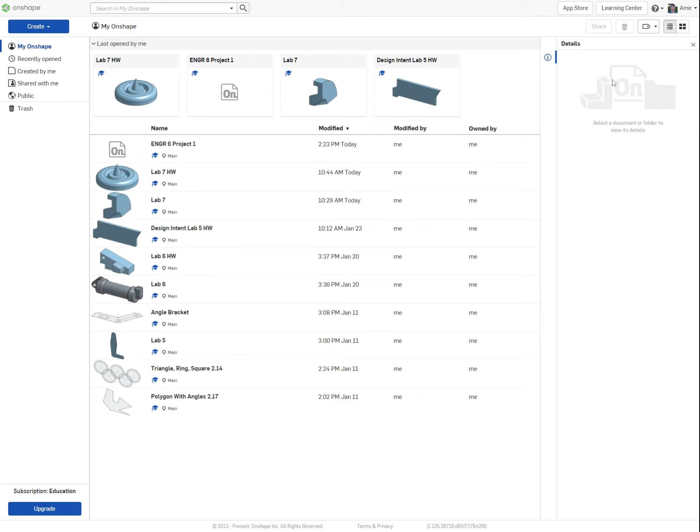I'm going to call it Lab 7 Tutorial. We're going to create a new sketch. I'm just going to make it on the front plane.

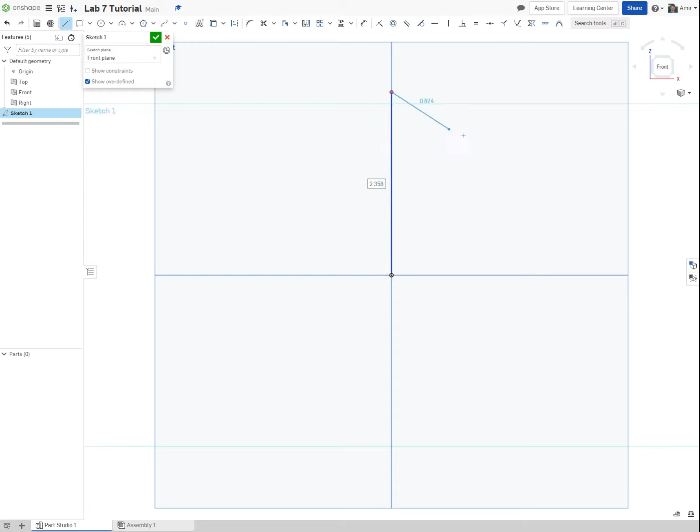As always, I'm just going to throw it on all my lines and then we're going to constrain them later. So vertical, diagonal, vertical, horizontal, vertical, horizontal.

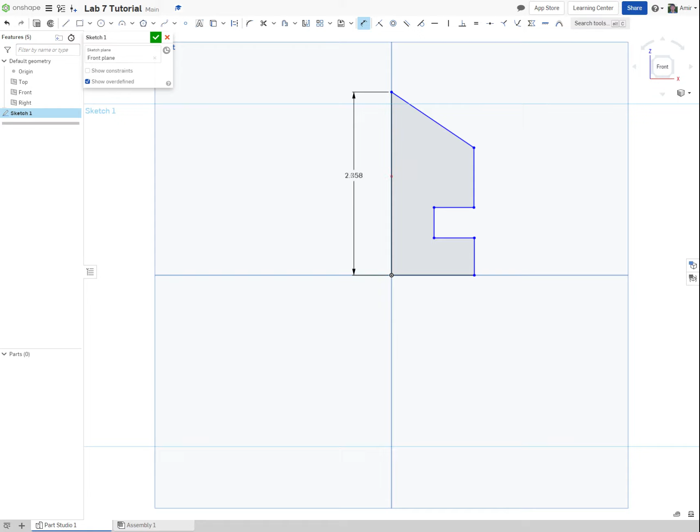All right, so this is what the general shape looks like. Now for dimensioning, I used each line on the graph as 1 unit, or I guess for this it'll be 1 inch. So starting with vertically, it's going to be 6 inches.

Horizontally, it was 2. Here it was 1. Here it was also 1.

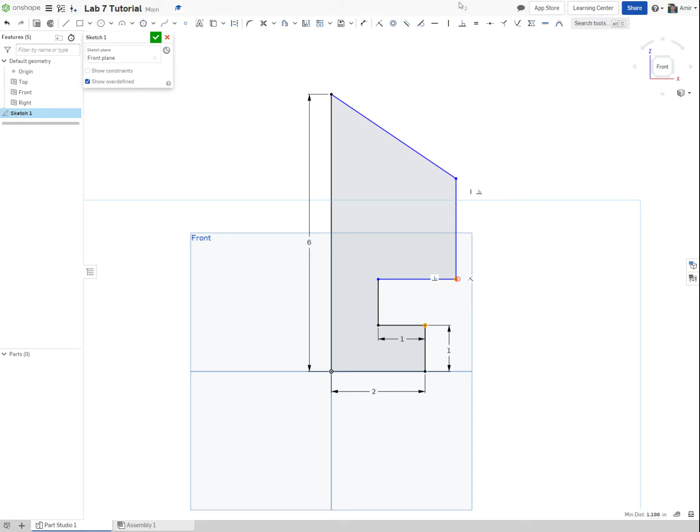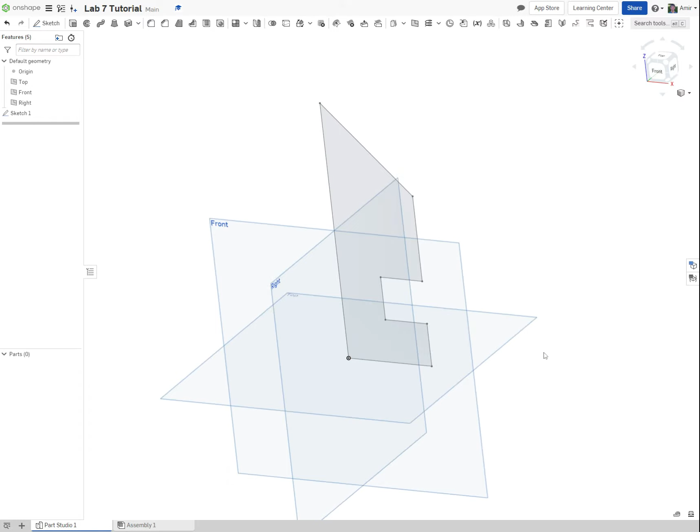And that's the sketch. All right, so now we need to finalize this, and we're going to work through each one of the steps. So for the first one, it's just a simple extrude. We're going to extrude this, and it's going to be 5 units. Okay, finish that. So that's the first part.

Now for the next profile, I'm going to duplicate this. I'm going to come here and delete that. So now we still have my sketch, it's all there. And I'm actually going to go ahead and duplicate this twice, once, twice, that way we can finish them later.

So for this one, we're going to do the revolve. Grab our revolve tool, click on the face, and our axis is just going to be the vertical axis. So we get something like this. That's that second one.

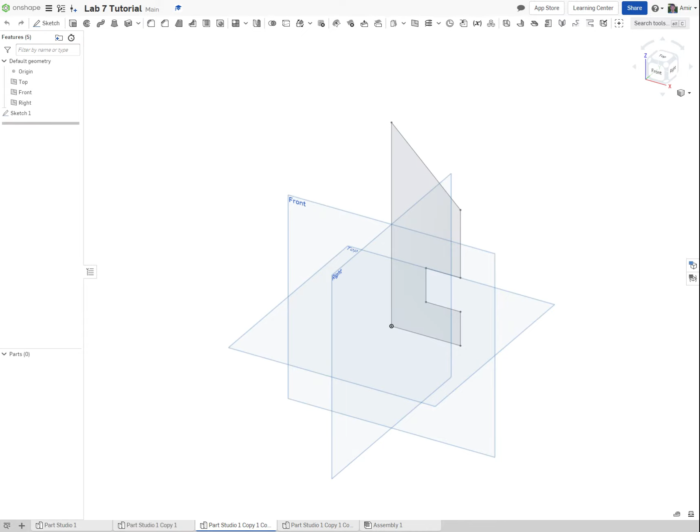Now for the next one, we're going to do the similar thing, but do it over the x-axis. Grab that, grab our face, and that's what it should look like. Go ahead and finish that up.

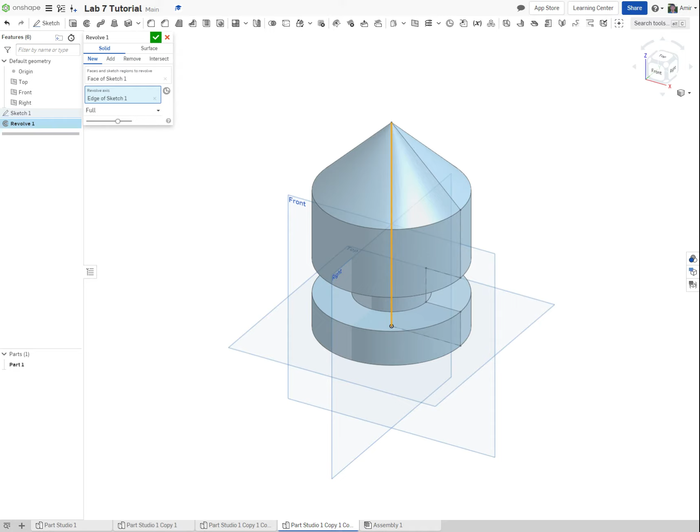Now for this one, we're going to do something similar, around the y-axis. But instead of doing it the whole way, actually no, it's around this axis. It's going to be one direction, 90 degrees. And that's how you do that.

Okay, so now we're going to do the next part. I'm going to create a new part. We're going to make a new sketch on the front plane.

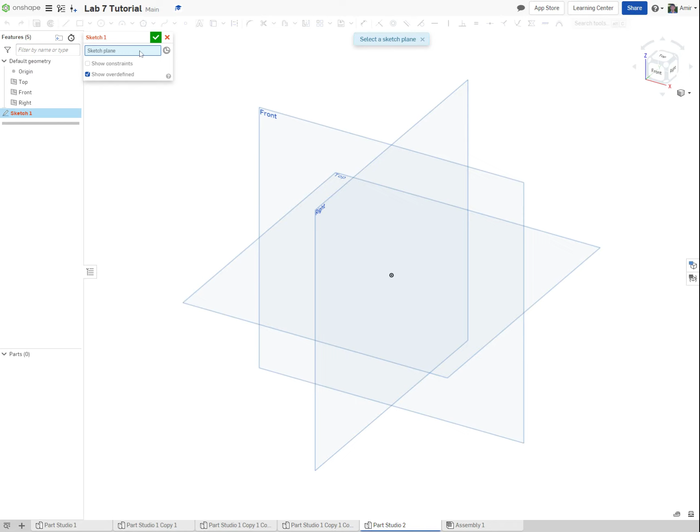So for this one, similarly, I'm just going to go through and draw my lines. I'm going to have to fix that vertical one later. So this one needs to be vertical, right? And let's just start dimensioning.

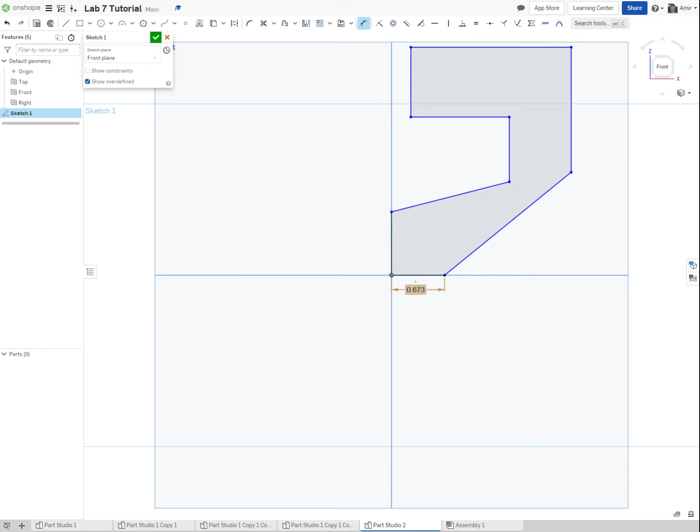This one's 1. This one is also 1. Hold on, let me move this up here. Let's see here, this is going to be 2.

Between here and, actually no. Between here and here, it's going to be 2. Between here and here, it's going to be 3.

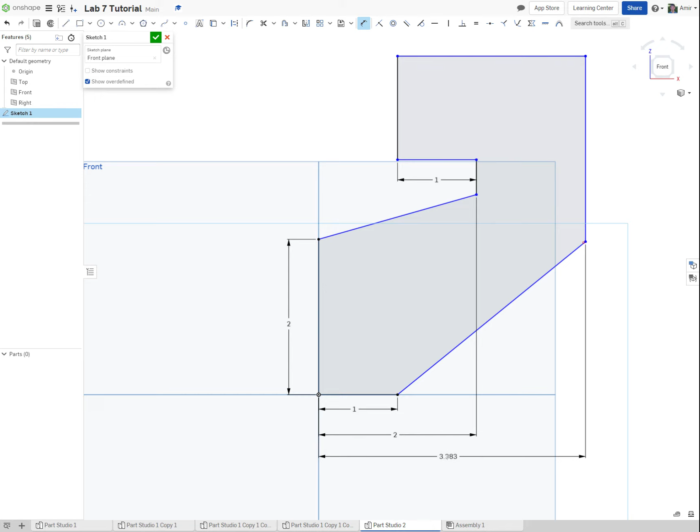Now we go from here to here, it's going to be 5. Here to here was 3. Here to here was 6. Okay, and then the last one, wait, it's this one.

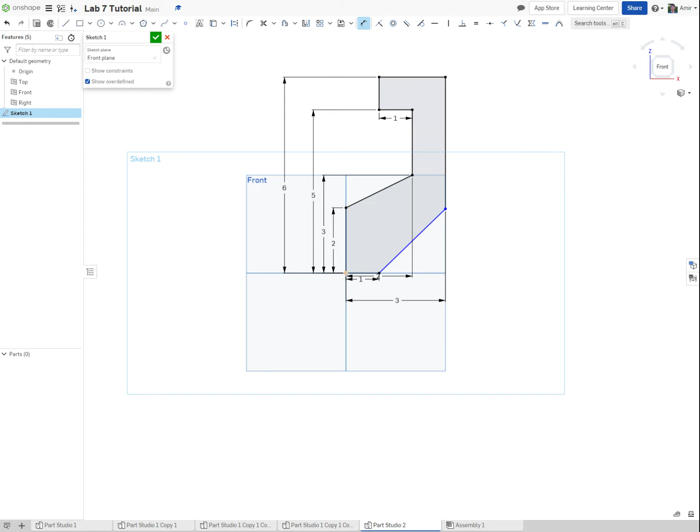So I can just make this point and this point horizontally aligned. That's how we do that. Okay, let me just fix this so that you can see. So that's what it should look like.

And we're just going to do the same things. Let me just adjust the perspective. I'm going to duplicate this 3 times, 1, 2, 3. Okay, so first thing is extrude 5 inches.

Okay, that's what it should look like. The next one was revolve around the vertical axis. Should look like that. You'll notice that it's kind of hollow inside. That's kind of cool. Next one, oops.

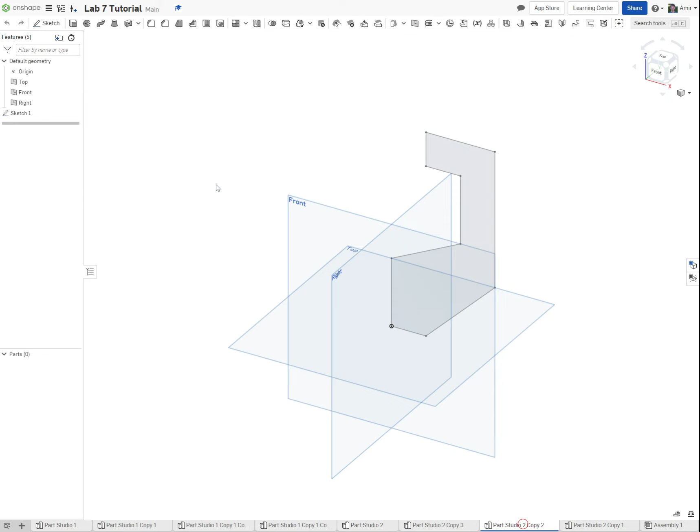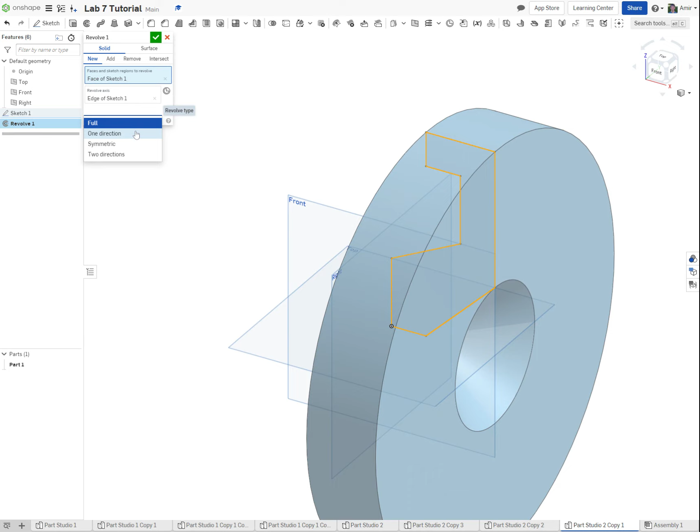It's going to be around the horizontal axis. Should look like this. And the last one, revolve around the horizontal axis, one direction, 90 degrees. So that looks like that.

Okay, and all these parts together are what you need to turn in for Lab 7. I hope this helped.